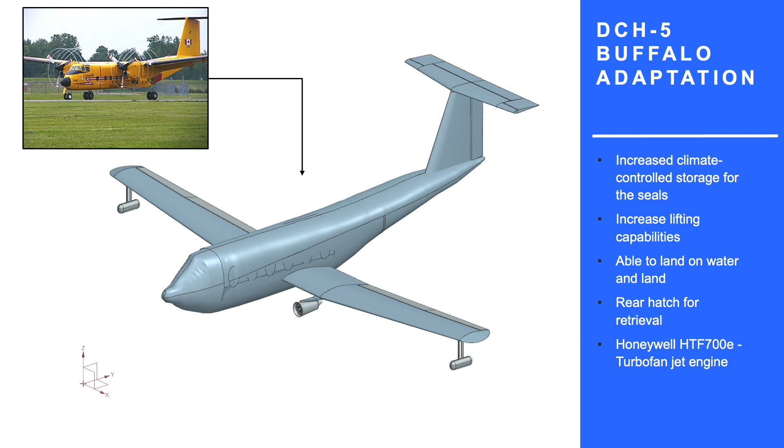Our airplane is also capable of flying higher than the clouds in the sky, at a whopping 45,000 feet. To put into perspective the size of the aircraft, it is about the length of a basketball court, the height of a giraffe, and the weight of an adult male elephant.

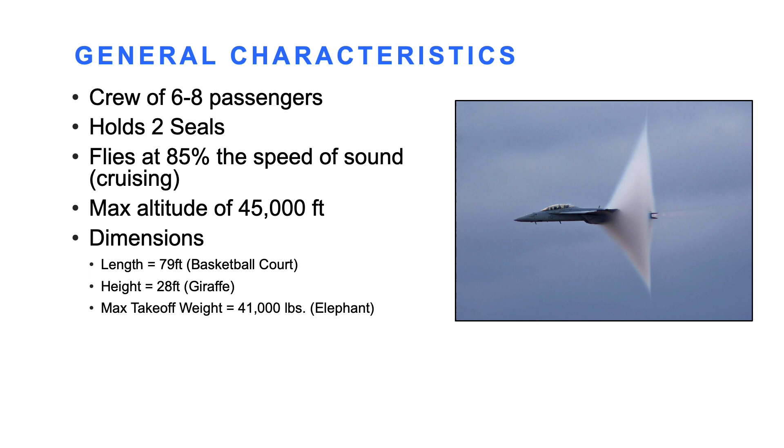So how the actual aircraft works is much like a bird. It uses its wings to flow through the air and moves parts of its wings to turn. This is much like how your parents use a steering wheel to turn a car.

The pilots of airplanes have a type of steering wheel too that can cause the airplane to pitch, which moves the elevator, which causes the plane to go up and down. Or you can use roll, which moves the ailerons, causing the plane to go side to side. And lastly, yaw, which moves the rudder, causing the plane to go left and right, shown in the picture on the right here.

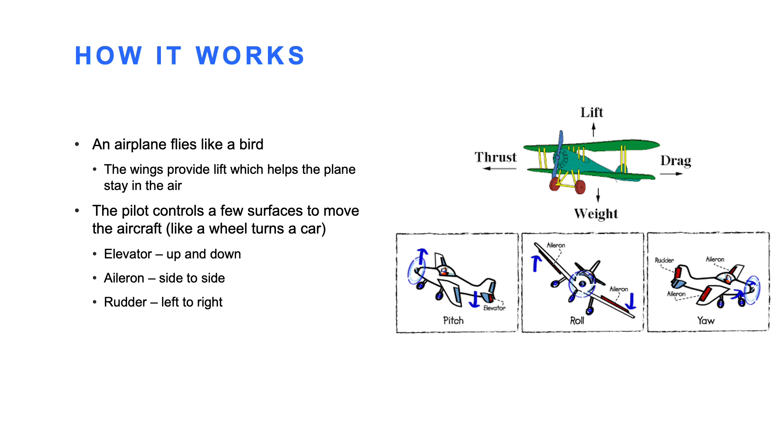Here is an actual demonstration of our aircraft flying in the Arctic. Notice how it's floating in the air much like a bird.

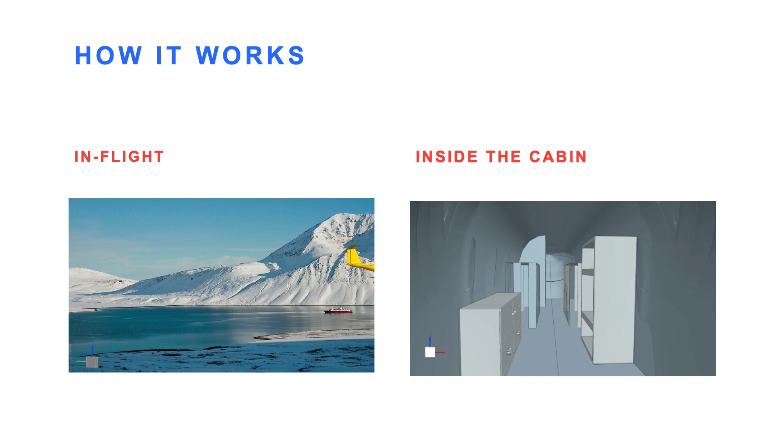And here is an inside look of the airplane itself. We can see some storage compartments for tools and the cages we will be using for holding the SEALs safely on the flight. Lastly, at the back of the airplane, a fully functioning bathroom for the crew to use during the long flight home.

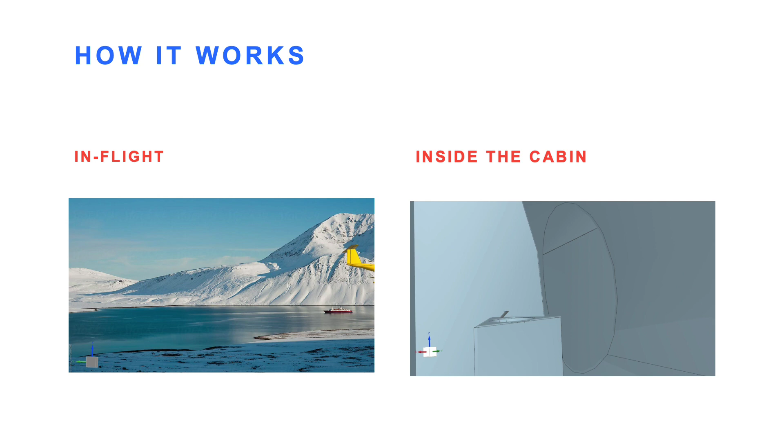Next, let's take a look at the individual sections of the airplane. First, we have the vertical tail of the airplane, which resembles a dolphin's dorsal fin. The vertical tail provides the pilot the ability to turn left and right.

Next, we have the wing of the aircraft. This allows the aircraft to fly like a bird by providing lift and thrust through its wing and engines. Both are required to have takeoff, cruise, and landing of the actual airplane.

The part sticking out of the right edge of the wing is known as the pontoon. This pontoon was designed to allow the aircraft to land safely in water, by allowing the aircraft to float and preventing the engines from getting wet.

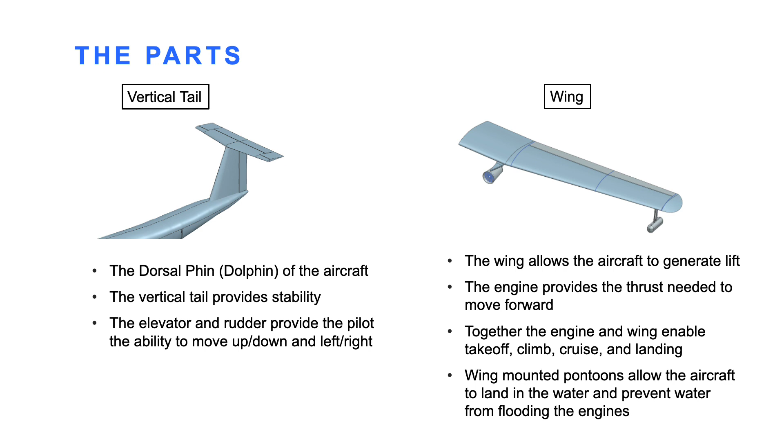Next, the fuselage is a lot like the body of the aircraft. It's like a protective shield against the outside that allows everyone to feel comfortable inside. Something to note is that at the front of the fuselage, this is known as the cockpit. This is where the pilots will sit in the airplane and control it.

Now, moving to the backside of the aircraft is the cabin. This is where the crew, SEALs, and storage compartments will remain for the entirety of the flight. Included is a fully functioning bathroom that we saw in the demonstration earlier.

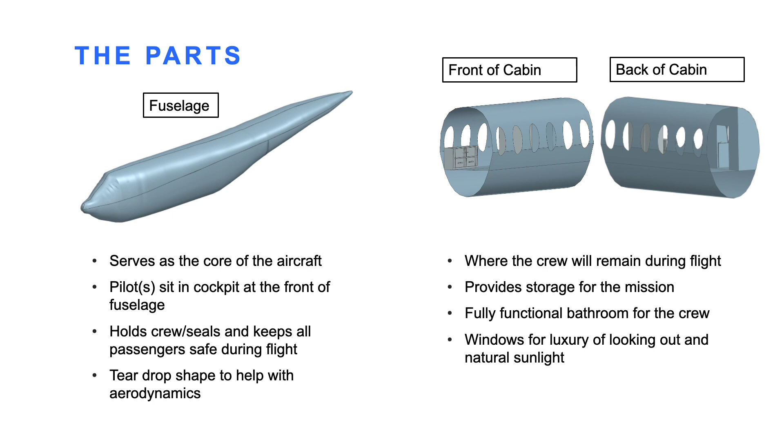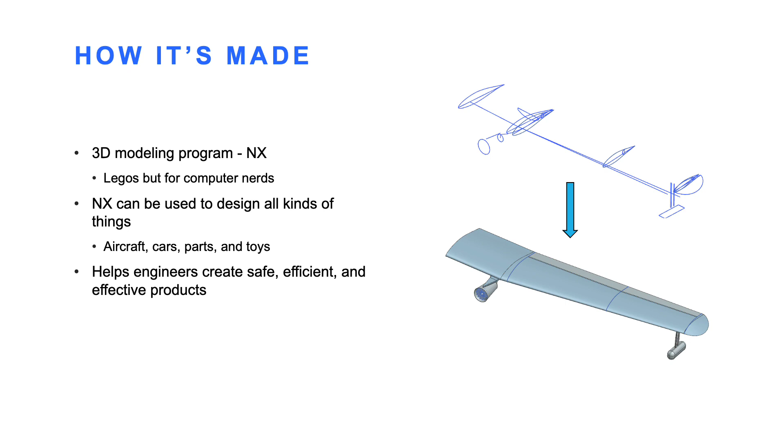This design tool allows engineers like myself and my team to build safe, efficient, and effective products. Something else that we always must keep in mind as engineers is safety. To do this, we adhere to the Federal Aviation Administration, the FAA, on all guidance for airplanes. With their help, we are able to put safety first and protect human and SEAL life.

Lastly, I want to call you to help us save the SEALs. Some important reasons are that the SEALs, if you did not know, are on the verge of extinction. Their home is melting and it's all our fault. And most of all, they're just so adorable.